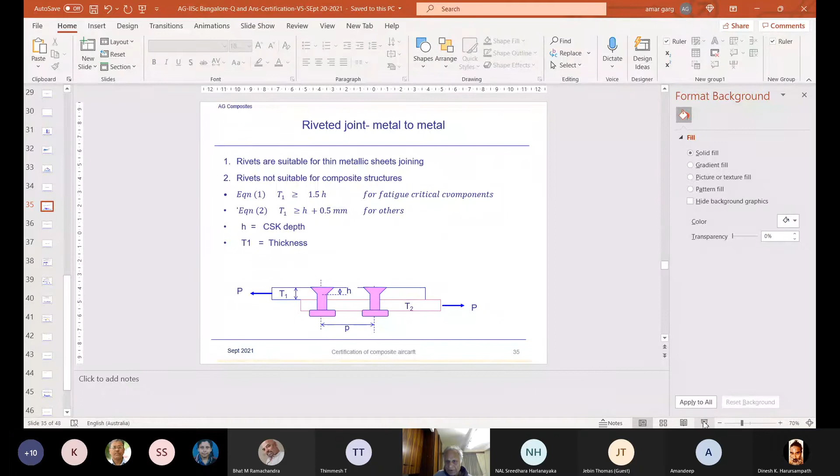Good afternoon everybody, it's the third lecture of the series of lectures. Before I start my certification lecture, I think I would just try and show some of the answers to the questions raised during the last lecture. Can you see my presentation now? Yes, we can. Please go ahead.

Okay, now some of the answers. One question was raised: we showed WFD's MED, MSD for metallic structure, how it is applicable to composites. I said damage propagation due to fatigue. Also, we know composites are not sensitive to fatigue damage propagation under cyclic loading as metals are, and the composite philosophy generally shows no growth of damage.

Some of the issues with this, I could discuss for a long time, but I don't have time currently. We could recognize that WFD for such a structure could be delaminations or bond line failures at a couple of places, and then during fatigue, these delaminations or bonds could grow and try to merge together to form a large disbond. So this could be considered another widespread fatigue damage.

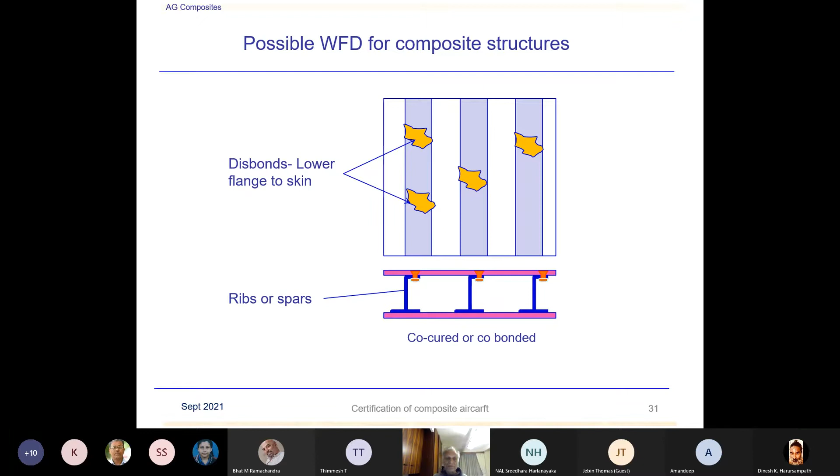In composites, another scenario could be similar to the previous slide. You have the stiffeners which are bonded, generally co-cured, or could be co-infused, and they could have some disbonds at localized positions. During fatigue, they could grow at various elements like stiffeners and join together, and they can disbond and fail these stiffeners, so structural integrity will be an issue.

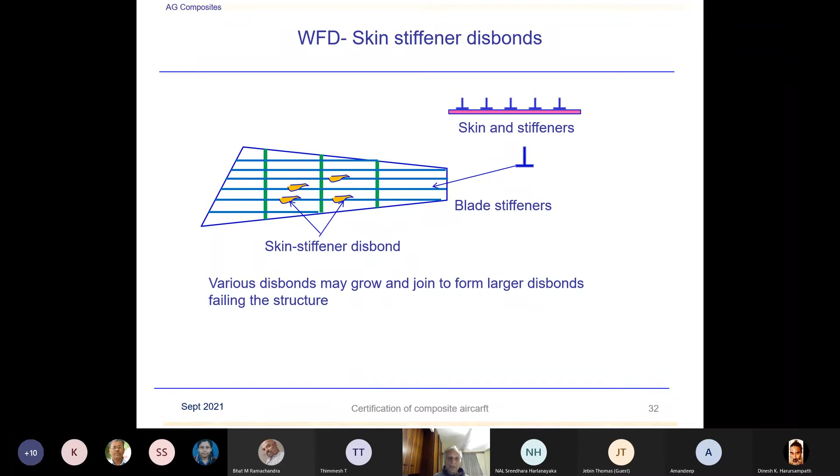Same thing could happen. You see a typical structure where we have the skins joined together. At the trailing edge, I've shown it has to be a double countersink fastener, because you need an aerodynamic surface on both sides. And generally what happens is these double countersink fasteners are always a problem in the trailing edge joints.

There's a possibility under cyclic loading these fastener rivets—we don't call them rivets, we call them fasteners, double countersink fasteners—could fail under cyclic loading in an emergency situation, high cycle fatigue, like the flap being in an engine environment with very high cyclic fatigue loads. It's possible some fasteners might fail if not properly designed, and once they fail, they can start unzipping the trailing edge. So this is another widespread fatigue damage in composite structures.

I could list many other scenarios for such damages. However, these are just examples I've tried to show to justify that WFD is not only defined for metallic structures, but is equally valid for composite structures in various scenarios.

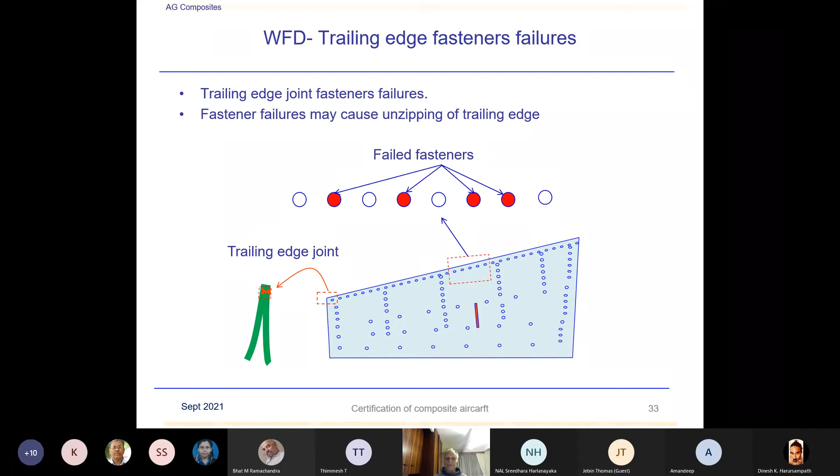All right, I won't go into the details of this one. Next, another question was asked about some guidance on riveted joints. Normally in composites, we never use rivets. Suppose using thin sheet metallic structures where rivets are used for fastening—I won't go into the details of this. Again, rivets are suitable for joining thin metallic sheets, and rivets are not suitable for composite structures. As I said, we don't use rivets in composite structures.

So the requirement for a countersink, so the knife edging is avoided, is T1 must be greater than 1.5H, or H by T less than 67%. Normally we design bolted or riveted joints so the countersink does not cause knife edging. Another requirement has been put by Michael Niu—normally we don't use this requirement, but I've quoted it. Michael Niu mentioned this in his book, and normally we design all our structures with this requirement.

Now I won't go into the details of this because, as shown in the next slide, there will be a separate lecture delivered on bolted joints. I've got about 150 slides for the bolted joint, and although I had committed to Professor Dinesh on the bolted joint, depending on the time permitted I will consider it—it's a very interesting aspect because joints are very important in the structure, and one has to be very careful designing the joints.

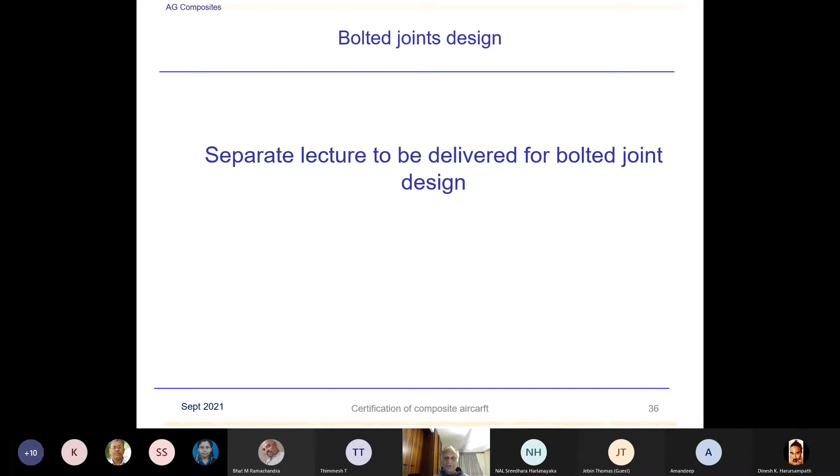So I would take up all the issues about the bolted joints for the composite structures later on.

A bond test - somebody asked for guidelines on bonded joints. I've just put this up very shortly, because bonded joints itself is a big subject and I could have a whole lecture on that. This is just for qualitative tests, because normally if you want to quantify the strength of an adhesive, it's very difficult to find a coupon which gives you a good adhesive strength representative for the structure. There are a lot of issues with these coupons. They are just used as a qualitative test to compare one adhesive to another, and even then it might be difficult to compare using these specimens.

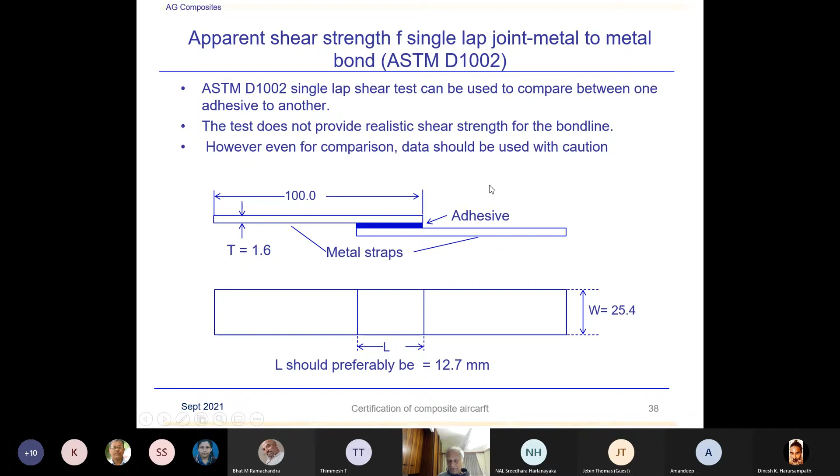When you load this specimen, if you can imagine, because of load eccentricity it will bend over here and create a lot of peeling failure. So ASTM D1002 single lap shear test can be used to compare one adhesive to another. This test does not provide realistic shear strength for the bond line. However, even for comparison, data should be used with caution. You can look into the ASTM D standard - I can send you a copy later, or you can find it in your library. I've never used these coupons, by the way.

Another test - I have not drawn the whole picture - is the thick adherend test. This is quite commonly used to assess the stress-strain behavior for the adhesives, shear strength to strain, shear stress to strain behavior, to determine the shear modulus, and usually then determine a bilinear curve for the adhesive. The test is expensive. You can read about this in ASTM 5655, and I cannot go into the details of this test because of time limitations.

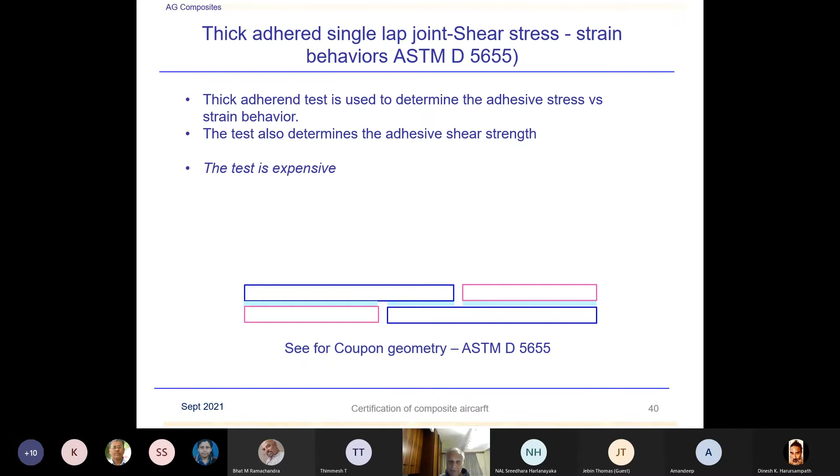Then our preferred approach normally is this one. Rather than the strength approach, as I mentioned last week, in today's time we would use the fracture mechanics approach for bonded joints, not the classical strength approach. So current practice to analyze adhesive bonded joints is based on fracture mechanics. An initial flaw of length A is assumed to exist at the bond line.

Normally it would be like 6.4 millimeters long and full width. So fracture analysis is performed for mode 1, mode 2, mode 3 to determine bond line integrity. At present I may not be able to go into the details of mode 1, mode 2, mode 3 failures - this could be another lecture.

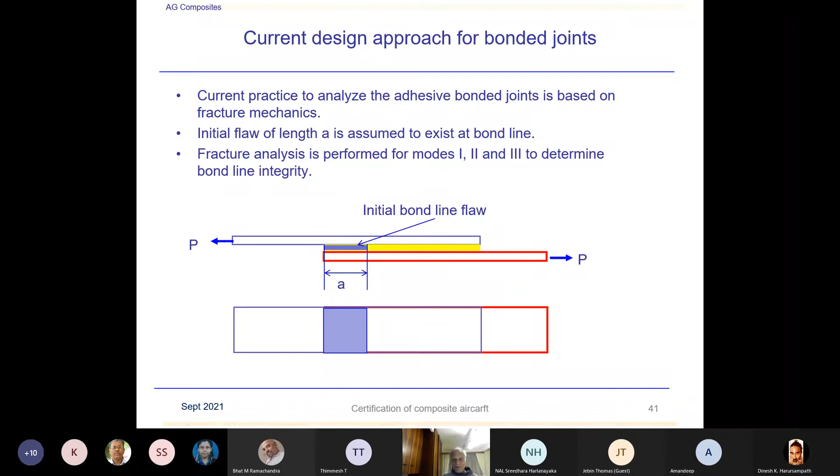In order to generate the fracture toughness, since these are really reliable, you use the fracture mechanics approach. Using a double cantilever beam specimen, you determine G1C, mode 1 fracture toughness, and edge notched flexure gives G2C. Usually the mode 3 value we would normally consider equal to mode 2, because mode 3 testing is difficult to perform in order to determine G3C, and since it's also a shear mode, it is usual practice to assume G3C equals G2C.

I've shown roughly the schematic coupon over here. Normally this coupon is 12 inches long, and the thickness could be about 2.5 to 3 millimeters for DCB. The same coupon could be used for ENF, which is called edge notched flexure, and this is a 3-point bend test. Equations are provided in any of these methods documents - you could look into NASA or ASTM.

These are very tricky tests. Let me tell you, what you will find using these ASTM standard tests is that you might still have to manipulate or juggle around to really find the initiation, and it's not easy. It looks simple, but when you are trying to determine the right value of G1C, you find lots of scatter when you have analyzed the data for G1C and G2C. Then you have to fix up your criteria - what is my criteria in order to define G1C? Initiation, or 2% growth, or 5% growth - those criteria, I tell you, you will find a lot of variation in that.

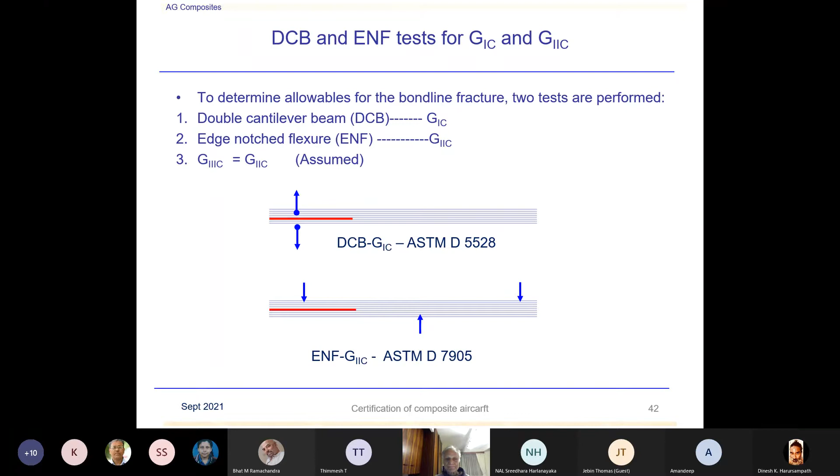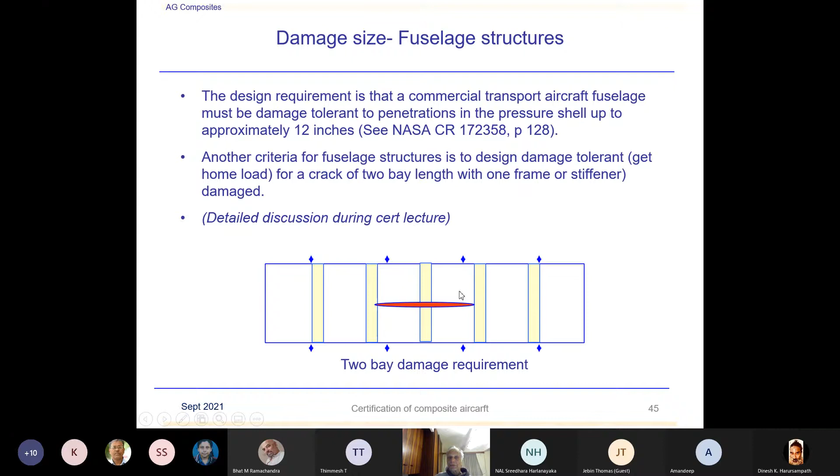Okay, next one, what did I have? Cabin noise. I'm not very familiar about this subject, and I did not really understand the question properly, whether it was about cabin noise source reduction. If the person who asked the question could elaborate. Sir, what I meant was the sound attenuation offered by composite structures is less compared to metallic structures—I read that in an article. So if that's the case, for the same external noise which occurs due to aerodynamic noise, whether the cabin noise, meaning interior of the airplane, will be higher, and if so, it will affect human comfort. That was the point I was asking.

Okay, now if you look into current transports, the 787 is fairly quiet, and this noise consideration has been there because sources of noise are many—due to engines, the turbulent boundary layer, interior air conditioning systems, pressurization—all that has been considered, and there are noise absorptions. But I'm not very familiar about this; I could look into it now. You've elaborated the question a bit more, and next lecture I might try to look into it more carefully and answer your question. That's okay sir, thank you.

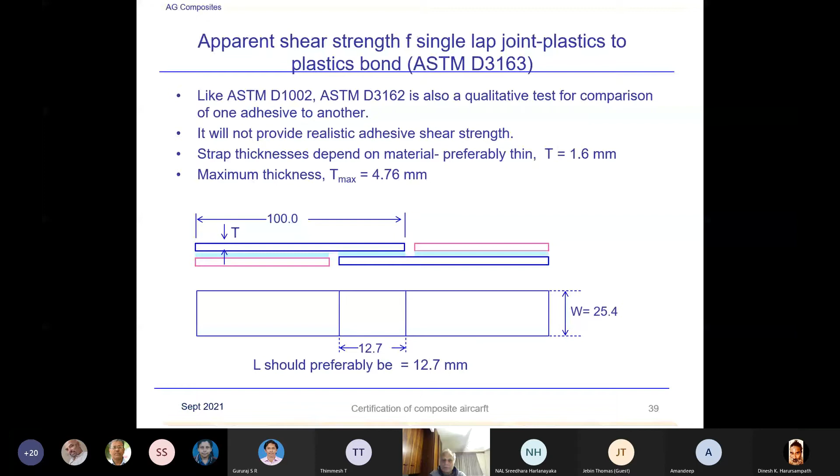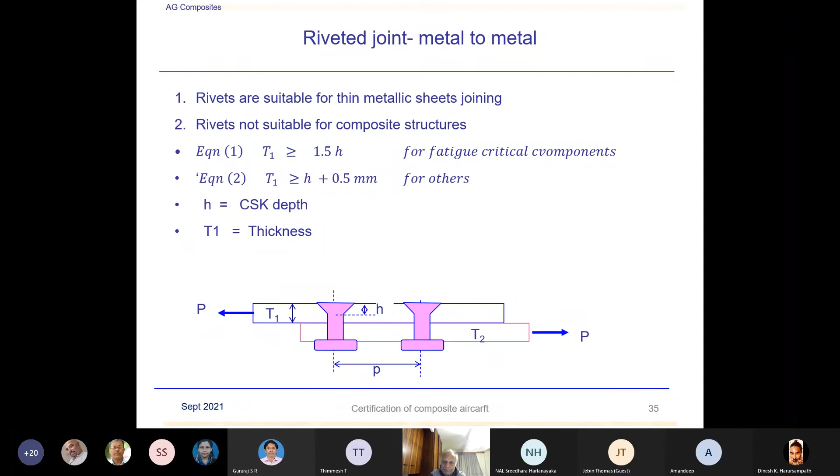So was there any other question from the previous one which I missed out? Anyone? Are the persons who asked the question satisfied with these answers? Okay, if there's no concern, then I could stop this presentation and share the next one.

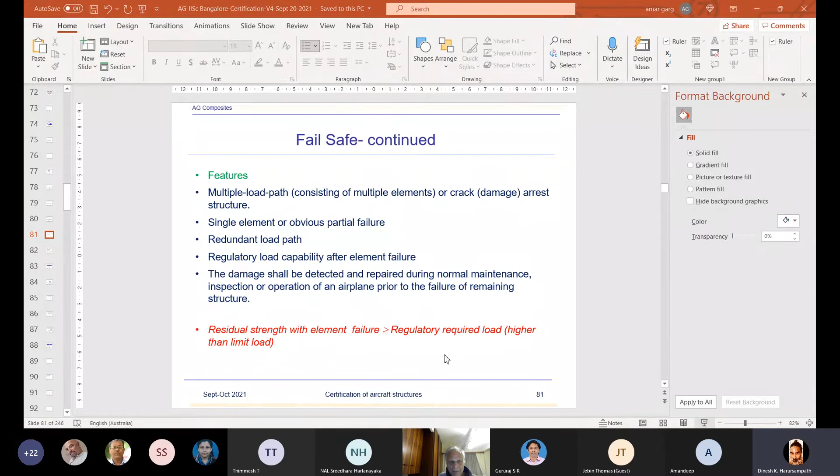Can you see this presentation now, the certification one? Not yet, Dr. Garg. That means let me go to the tray again. Share. Stop sharing, share, open tray. Okay, we can see a slide titled 'fail safe.' So this is the one which—I've forgotten where I stopped last time. I think I stopped at this slide, and then we said we'd restart fatigue and damage tolerance. Did I show this slide last time or not? I'm confused because I was delivering a lecture to IIT Kharagpur people also last week, so I've forgotten which slide I stopped at. No, this slide was not discussed, Dr. Garg. Okay, I think we can start from here. Yeah, I'll start from there.

So, structure fatigue and damage tolerance. Now, fatigue life philosophy—this is important to consider the various philosophies: safe life, fail safe, damage tolerance. What is the difference between these three? If you remember last week when I was talking about historical failures and how the certification approach changed—initially, when the Comet failed, the desired approach was safe life.

After that, in 1978, damage tolerance came up—sorry, after the Comet failure, the amendment was in the mid-50s when fail-safe was introduced, and later on, when another aircraft failure occurred, even fail-safe was not adequate, so damage tolerance requirement came in. So after '78, it's a damage tolerance requirement.

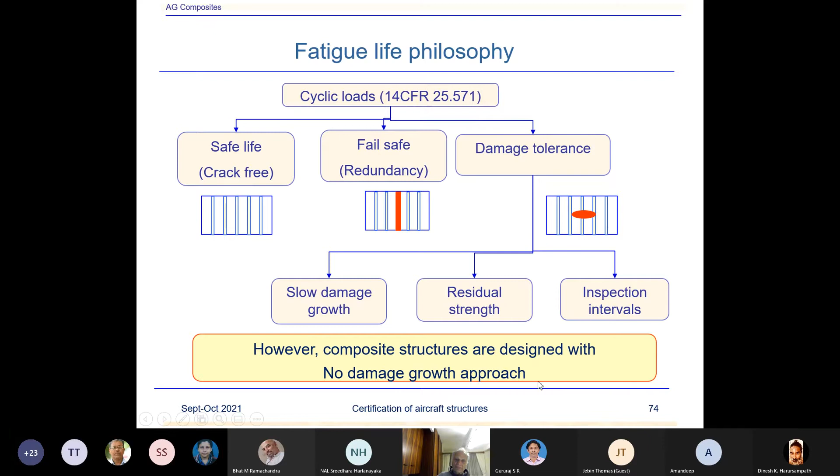The issue with slow damage growth prediction is in metals. That's fine because you can predict the life or number of cycles within which the initial crack will grow to a particular length. However, that damage growth prediction is not possible for composites. There are hundreds of publications where people have tried to predict damage growth in composites using several different methods, and still it's not a reliable or easy solution. That's why the current approach for composite structures is the no damage growth approach. We'll talk about this in more detail.

I just quoted a few paragraphs from the 571 requirement, the safe life requirement. Fatigue safe life evaluation: compliance with the damage tolerance requirements of paragraph B, which is damage tolerance, is not required if the applicant establishes that its application for a particular structure is impractical. What this says is, if for a particular structure damage tolerance is not possible, then safe life could be used - that is, inspection is not possible, as I showed last week in the failures diagram. The structure must be shown by analysis, supported by test evidence, to withstand the repeated loads of variable magnitude expected during its service life without detectable cracks. And an appropriate safe life scatter factor must be applied, of course.

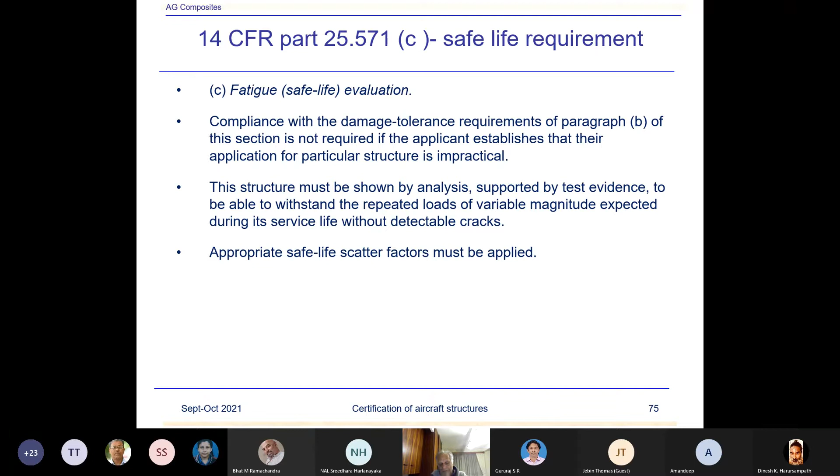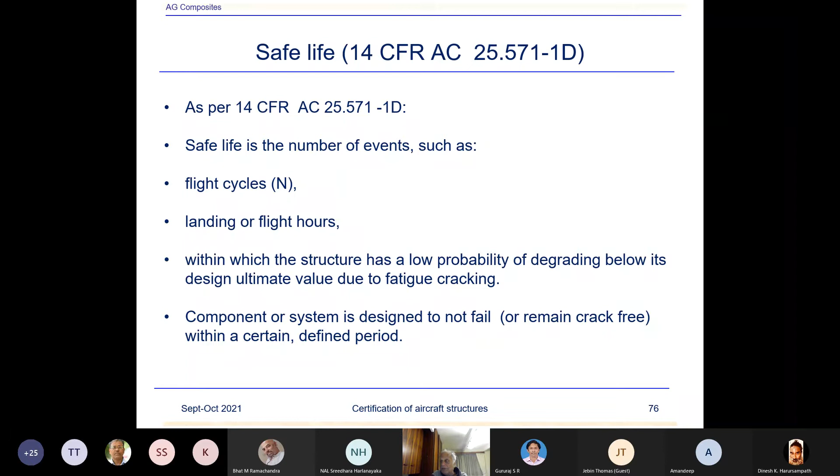So, safe life - how does 14 CFR AC 25.571-1D define it? Safe life is a number of events, such as flight cycles, landings, or flight hours, within which the structure has a low probability of degrading below its design ultimate value due to fatigue cracking. So a component or system is designed to not fail or remain crack-free within a certain defined period. It should not develop any crack for the defined period for which you have designed the part.

This is what I have diagrammatically shown when you try to justify a structure based on safe life. Here you see the residual strength capability plotted against cyclic loads. Suppose you have tested the component for N-test cycles - the residual strength after the end of this N-test should be above DUL, the design ultimate load carrying capability of the structure. Then you define safe life as equal to N-test divided by SF, the scatter factor, which for metallic structures is generally around 3 to 4. So basically, if you want to design a structure for 20,000 flights, you'll have to test it for 80,000 flights in order to justify that 20,000 flight life.

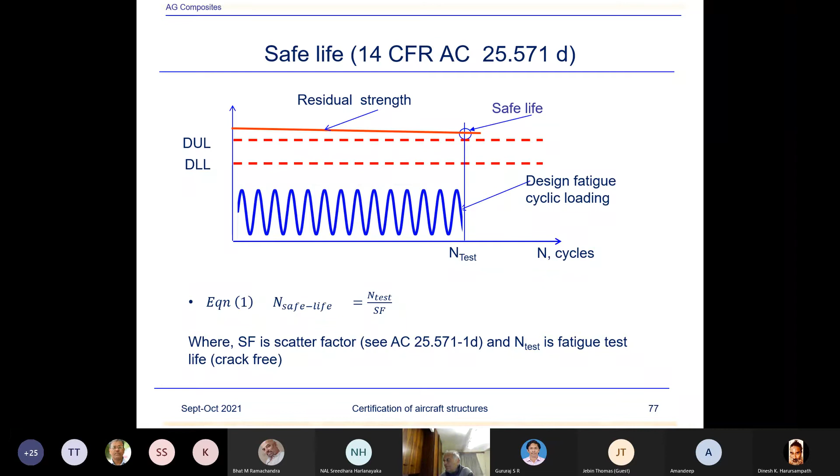Now, in spite of that 4 or 5 times safety factor, structures have failed earlier than expected, and this table is evidence of that. I've taken examples - these are all fighter aircraft. The KC-135 had a design safe life of 13,000 hours, wait - actually 13,000 safe life hours, however there were 14 cases of unstable cracking in the lower wing skins between 1,800 to 5,000 hours, and the lower wing surfaces were reskinned at 8,500 hours.

Next, the F5 had a 4,000 hour design life, but fatigue failure of the lower wing skin root region occurred at 1,900 hours, causing loss of the aircraft. Serious. The F111 had a 4,000 hour design life, but fatigue failure of the center box occurred at just 105 hours, causing loss of the aircraft. This fatigue failure was caused by a defect in D6AC steel center wing - this is brittle steel, and this is nasty. What happens is there could be a minor defect which you can't inspect internally, and that defect could be fatigue critical, causing a significant reduction in life.

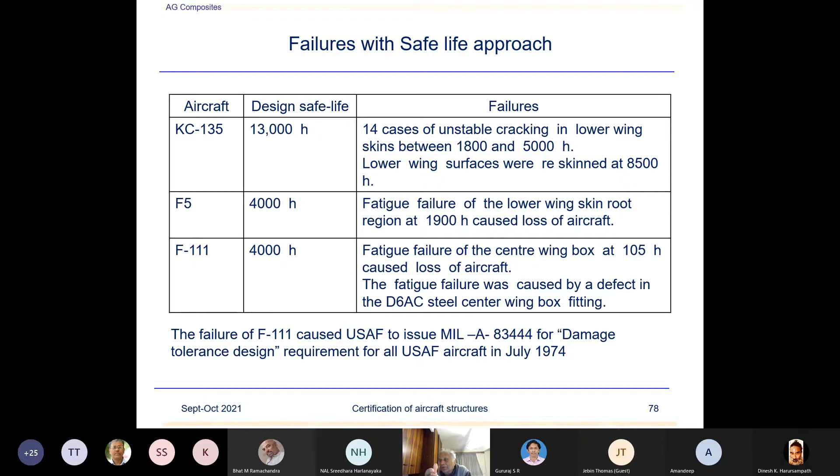This MIL 83444 document is obsolete. It has been replaced by JSSG 2006, which you'll find in my references. You can download it from the internet for free. It's interesting, especially if you want to understand a military airplane like Tejas. It may help you understand the certification philosophy. Most of the criteria is similar to FAR transport aircraft, but there could be some differences.

Issues with safe life, I've already talked about. I won't go into the details of this.

Now, fail-safe requirement. The definition per 14 CFR AC 25-571-1D: fail-safe is the attribute of the structure that permits it to retain its required residual strength for a period of unrepaired use after the failure or partial failure of a principal structural element. When one element fails or partial damage occurs, the remaining structure will not fail within a specified period of time, and residual strength with element failure must be greater than the regulatory required load.

As I said earlier, with fail-safe, one of the members fails and it could be detectable damage. However, you don't repair immediately. This damage should be able to be sustained for two inspection intervals without reducing the residual strength below limit load. So the regulatory required load is normally the limit load carrying capability. Residual strength with element failure must be greater than the limit load requirement. That's the requirement.

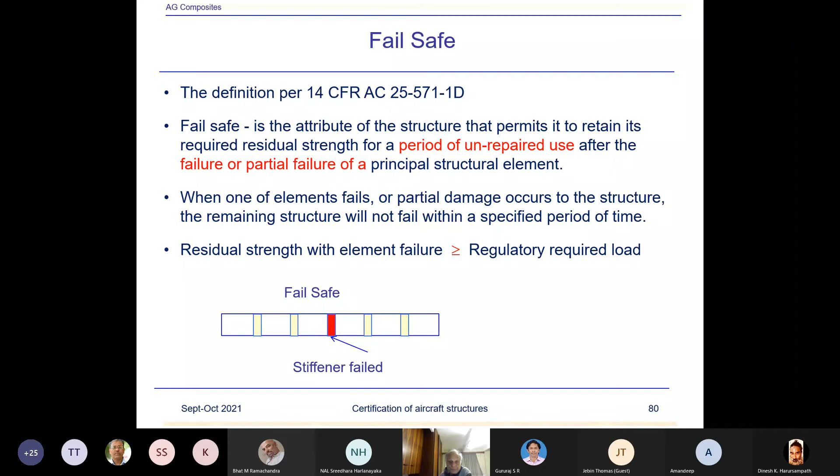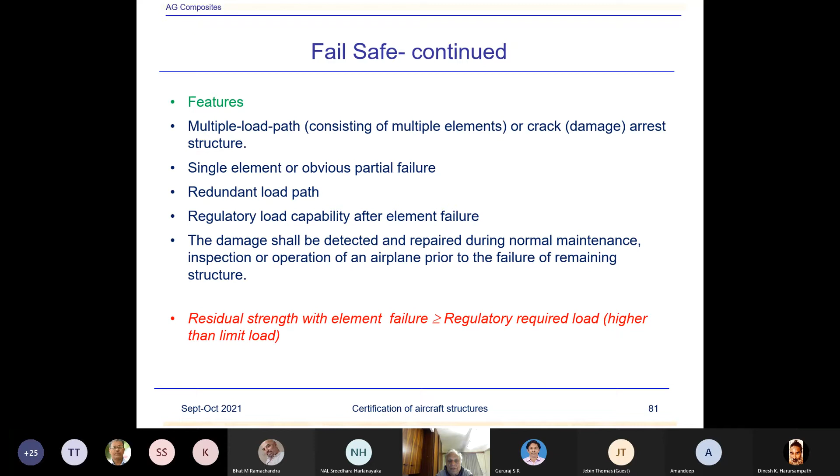The fail-safe feature includes multiple load paths consisting of multiple elements, crack damage arrest structure, single element or obvious partial failure, and redundant load path with regulatory load capability after element failure, normally the limit load carrying capability. The damage shall be detected and repaired during normal maintenance inspection or operation of the airplane prior to the failure of the remaining structure.

Now, what is damage tolerance? This is what the main focus of our investigations would be. As I said, for current structures, in the majority of cases it's mandatory to design the structure with damage tolerance capability, unless we can't meet the requirement of damage tolerance, in which case we go back to safe life.

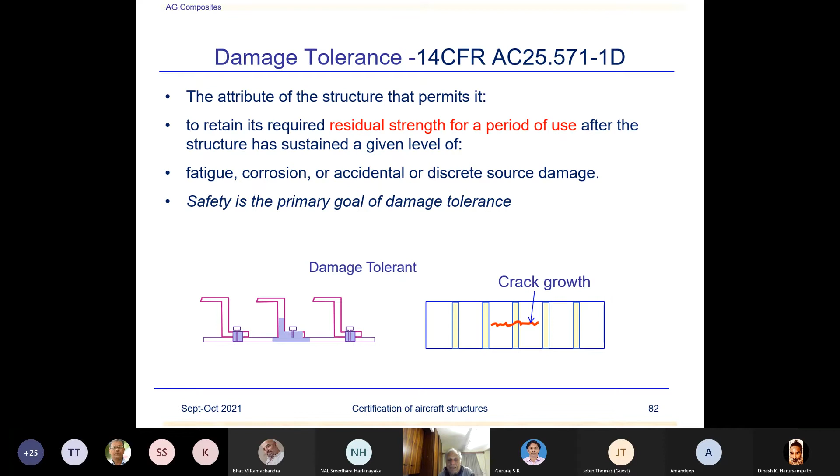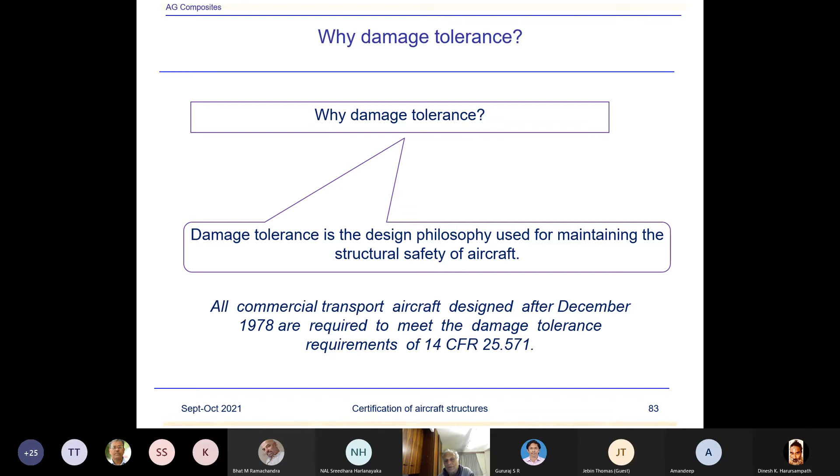Why damage tolerance? Damage tolerance is the design philosophy used for maintaining the structural safety of the aircraft. That is the major reason for designing the structure for damage tolerance. Safety is the primary goal. All commercial transport aircraft designed after December '78 are required to meet the damage tolerance requirement per 14 CFR 25.571.

Category 1 damage is undetectable damage. There are lots of damages like barely visible damage or manufacturing flaws like delaminations. Your inspection capability can't detect delaminations or disbonds in the structure below a quarter inch, or 6.4 to 7 millimeters, depending upon the probe. So those damages could always remain because they're beyond your inspection capability.

In the factory, there could be some damages like BVIDs. Fortunately, in metal, if there's a tool drop, hailstone impact, or some impact damage, the damage will be visible on the surface. Unfortunately, in composite, the damage caused by impact may not be visible on the surface—that's typical of composite structure. However, that impact would have done enough damage to the internal plies in terms of disbond, delamination, fracture of fibers, and cracks. So the requirement addresses BVIDs.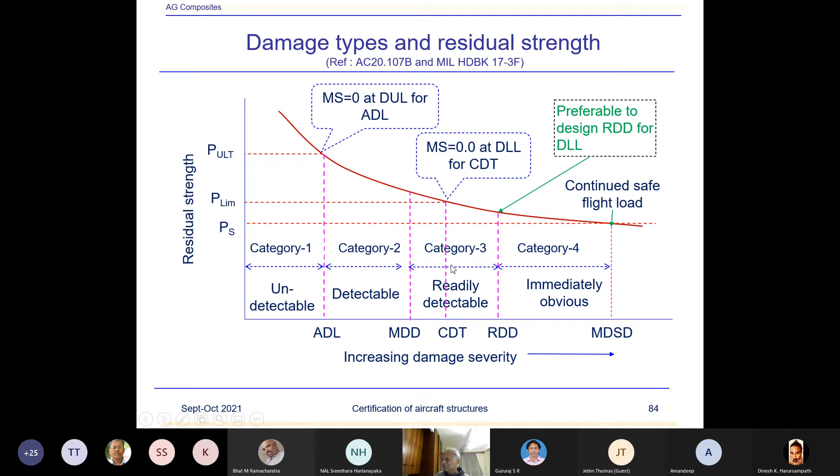Right, okay. Now category 1 damage, non-detectable or barely visible impact damage. This is designed to design ultimate load. Category 2, detectable damage, damage is detectable with high probability during walk-around.

Requires repair per inspection process when detected, that is after 2 inspection intervals, because you don't repair every time damage is found, you just ignore it if the residual strength capability is higher than limit. Design limit load until defined inspection interval, that is 2 inspection intervals normally we define.

Category 3, obvious, readily detectable within a few flights. When such large damage is there, like 6 inches, depending upon the criteria, I'm just quoting 6 inches, it could be 4 inches or more, readily detectable within a few flights of occurrence. So what happens in this one is this damage doesn't have to wait for inspection intervals. When during walk-around inspection such large damage is seen, the aircraft will not be allowed to fly until repair is done. So that's the difference between category 2 and category 3 damages, the repairability.

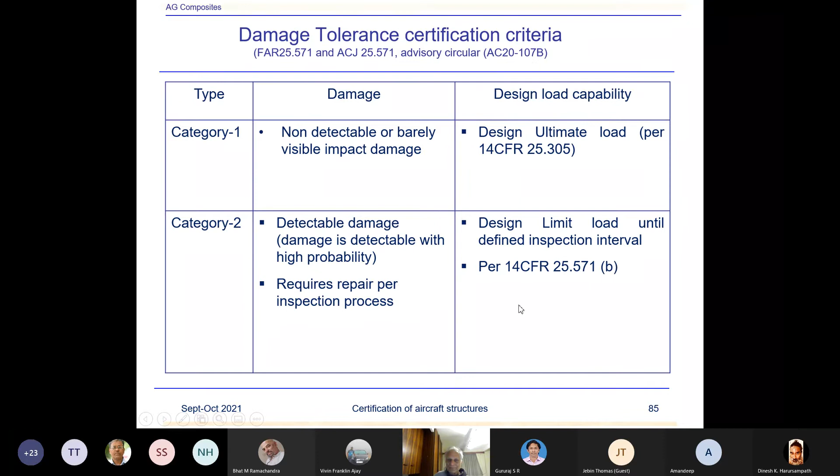So this is obviously detectable damage within a few flights of occurrence, requiring immediate repair, because that's a requirement. Once detected, the aircraft is not allowed to fly until the damage is repaired and returned to the ultimate load carrying capability. When you repair the damage, the strength after the repair must be ultimate load carrying capability, there is no reduction in that load carrying capability definition. Repair must be as per the new structure capability.

Excuse me sir, I have a question. Sure. Actually sir, when you're saying requires immediate repair, how exactly is the repair done? Because in case of composite structures, the parts are fewer, right? So do you just fill in the cracks, or I'm not understanding how the immediate repair is done?

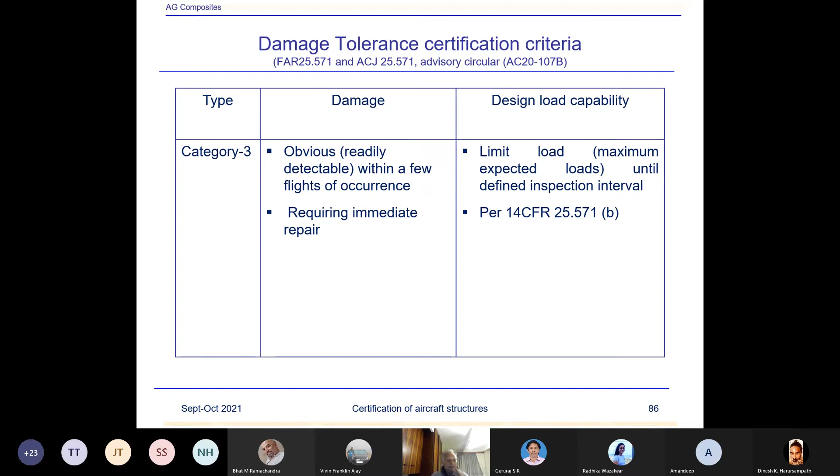You're asking me to define, okay. That depends, suppose there is a damage, suppose you have a skin, your skin gets damaged, then you have to repair like a scarf repair. Let me just try to find a slide if I can, to show you. In fact, I've done a lot of work on repairs. I'm not sure, let me see if I had put it in the ADA lecture. Sure sir. Question answers.

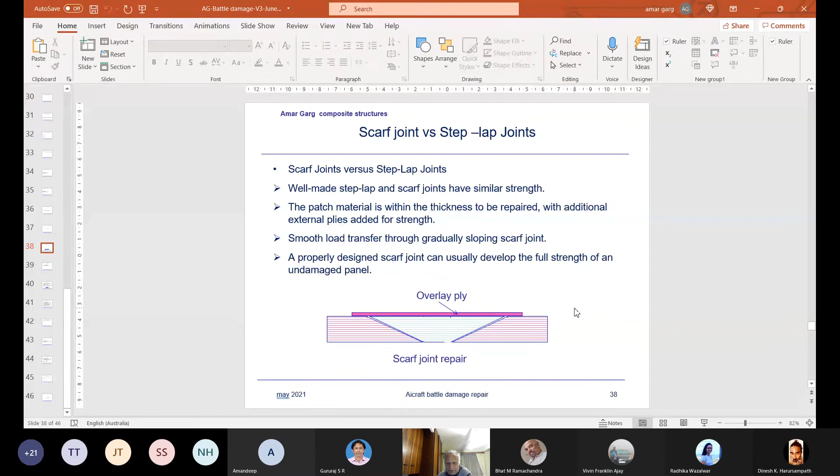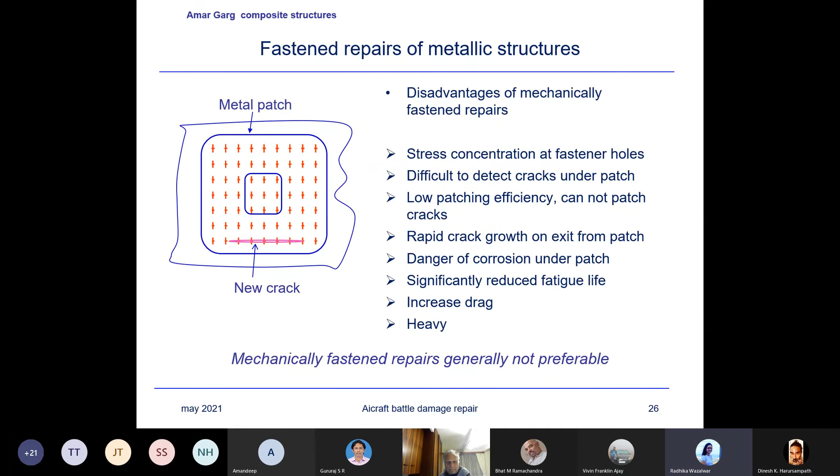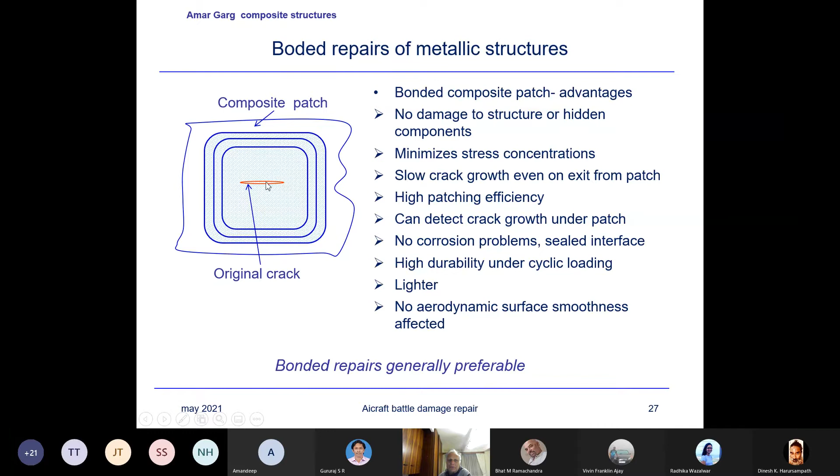Bonded structures. Suppose you have a skin, and there's damage. Normally you won't have such a sharp damage. In metals it's okay, but in composites the damage could be like a hole. So what you do is remove that damage, smoothen it out, scarf it. Normally we do the scarf repair, shown here in a section like this one.

So you have a damage, this was the amount of damage. But when laying up the plies, you can't just make a straight repair, so you scarf it. Normally the scarf angle is 1:30. For thinner structure, it could be as much as 1:50, otherwise around 1:30 scarf repair. I could talk more about that, but it's a detailed subject for repairs.

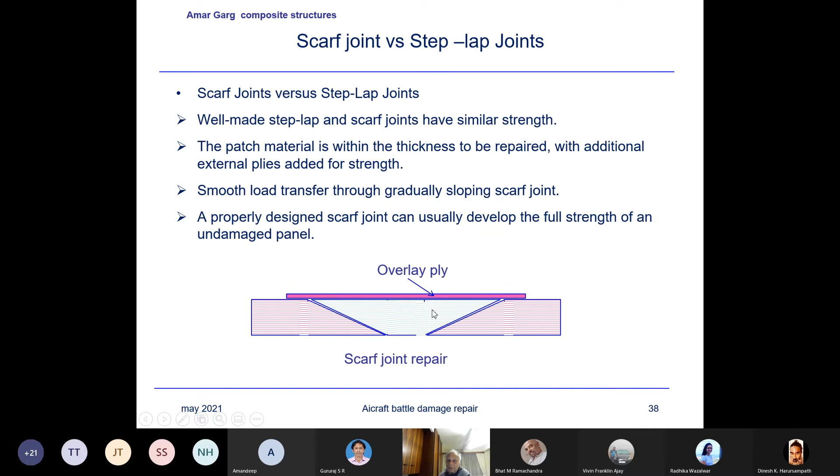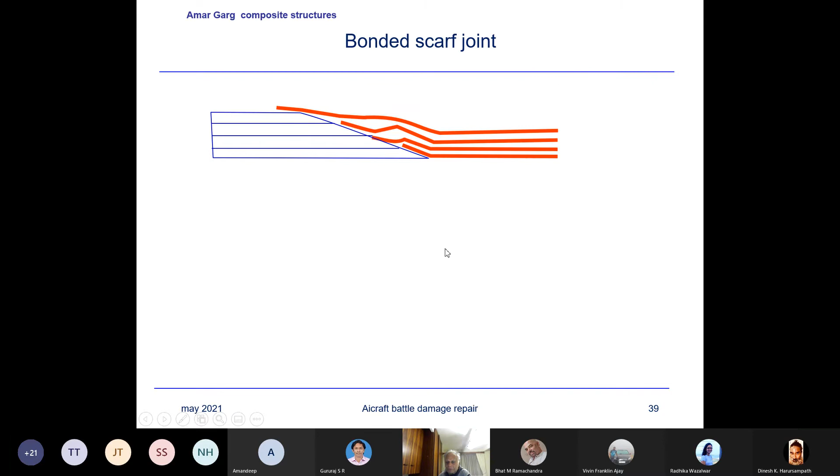And we lay up the plies. So this is our pristine structure, these are the repaired plies, and we put an overlay ply. This is a normal scarf repair, shown like this. This is every ply, and you are putting the repair plies with the adhesive. So normally this is the scheme. Another step-lap - rather than the step, we normally use the scarf I've shown you.

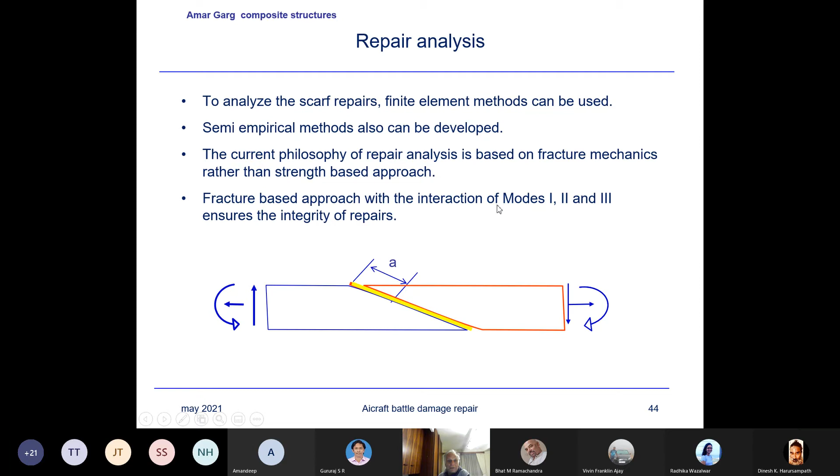This is just showing a coupon, which we normally consider in order to justify the repair. I've done a lot of work on repair justification. We would consider a fracture mechanics approach rather than the conventional strength approach - like the bond line fracture mechanics approach I talked about, which I'm very conversant with. I developed this methodology for the fracture mechanics analysis some time back. I can't go into the details because it's again a big subject for repairs of these structures.

Yes, I got it. Thank you. Okay, that's interesting.

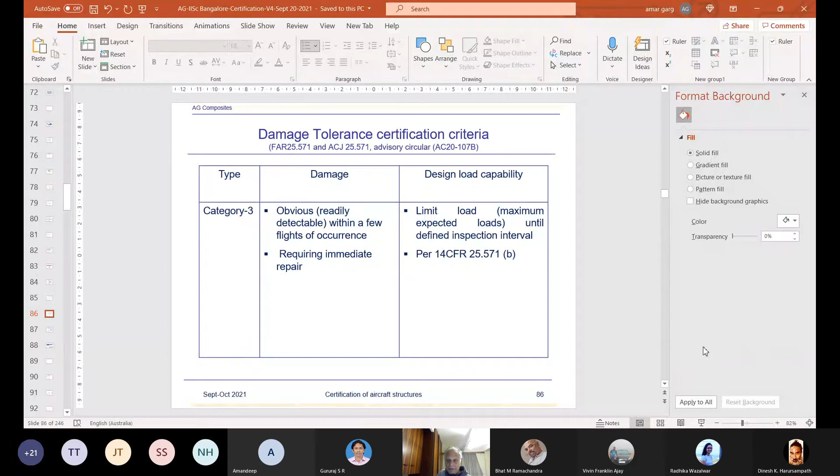So now let me just consider... okay, now this one. Category 3, category 4. Okay, you can see this presentation now? Hello? Yes, sir. Okay, so category 4.

In that diagram, category 4 damage is discrete source damage, which occurs during the flight, and the pilot or flight crew knows when it occurs. The causes of the damage could be bird impact, uncontained failure of engine, fan blades, high energy rotating machine, sudden decompression of compartment - requires repair before next flight.

Design load carry capability, according to the requirement, is the maximum loads expected during completion of the flight and 70% of limit maneuver loads and 40% of limit gust load, combined with maximum appropriate cabin differential pressure. Part 25.571E.

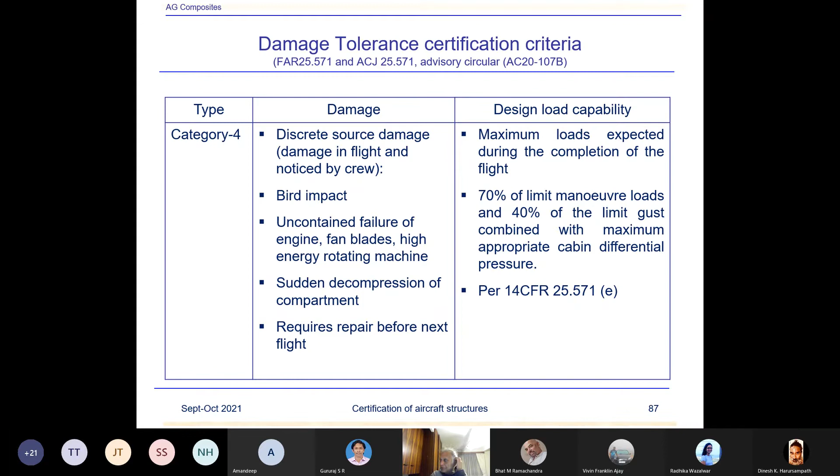Okay, so these cover the definition of various categories of damages, and I would recommend those of you interested in reading a few more details to look into AC 20-107B, which defines these damages in detail, or MIL Handbook 17, Volume 3.

Okay, now structure damage tolerance requirements from the compliance point of view. If you remember, previously I defined two types of structure: one is principal structural elements, another is non-principal structure. You can consider principal structural element to be a primary structure and non-PSE like a secondary structure. Normally we don't call them primary/secondary - according to 571.1D definitions, usually you call them PSEs and non-PSE structures.

That's the usual definition these days. So for damage tolerance, when trying to satisfy requirements for PSE, which is critical structure, you consider damage tolerance per 14 CFR 571 - that's what we've been talking about, damage tolerance in categories 1, 2, 3, 4. All of categories 1, 2, 3, 4 have to be considered for primary structures. Whereas when justifying non-PSEs, this criteria is not applicable - 571 not required, only category 1 damage tolerance diagram required. That is only BVIDs, very small undetectable damages, but not the detectable damage, for non-primary structures, non-PSEs.

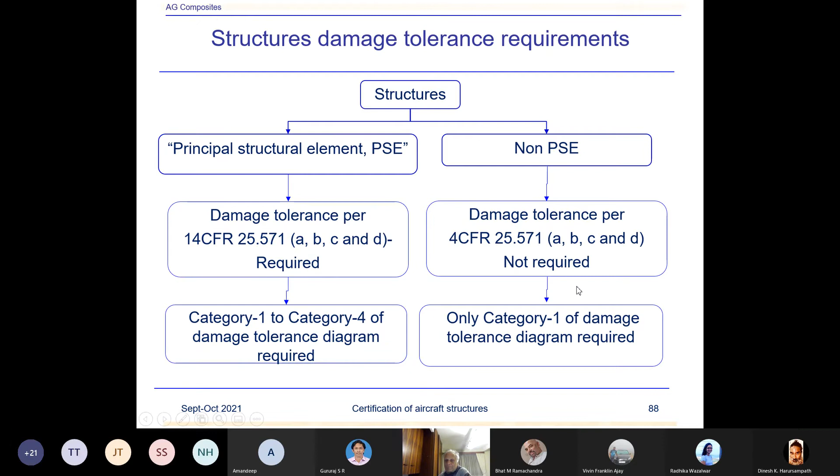So, okay, now what is durability? The durability is the ability of the structure to resist cracking, damage growth due to corrosion, hygrothermal degradation, delamination, wear, and the effect of foreign object damage for a specified period of time. Normally in durability we consider that damage doesn't initiate.

So durability addresses largely the economic issues. Damage tolerance addresses the safety issue, and durability addresses the economic issues.

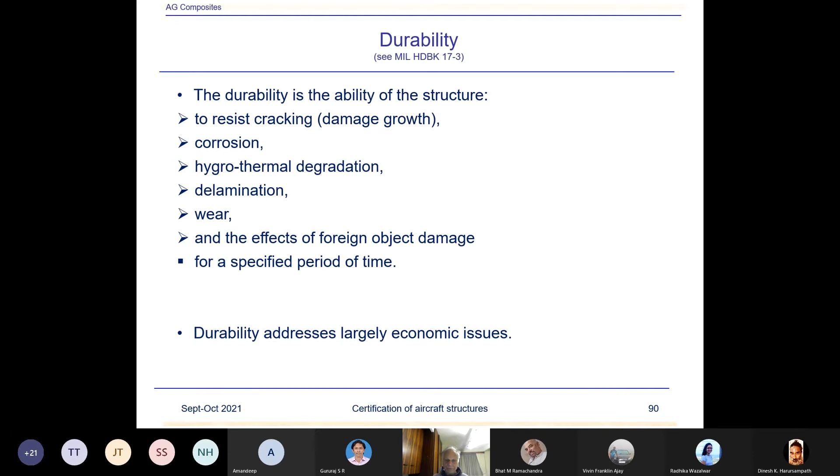The difference between damage tolerance and durability, I have tried to show in this slide schematically in a simplistic way. So durability often addresses the onset of damage from the operational environment. Okay, so what you see is damage size versus damage propagation.

Now, it looks like both are the same. The difference which I am trying to highlight here is that in this case, the damage size is not growing at all. It's a damage initiation phase, we call it. In this, the initial damage, if you have defined it like a hole, say, then it starts growing, and that's a damage tolerance design approach in this case.

You are trying to consider how much the damage is allowed to grow before it becomes critical from the residual strength standpoint. In this case, you are considering damage does not initiate. So basically, this is like a safe life approach here. In safe life also, we say damage is not initiating. So this is like a safe life here. This is damage tolerance.

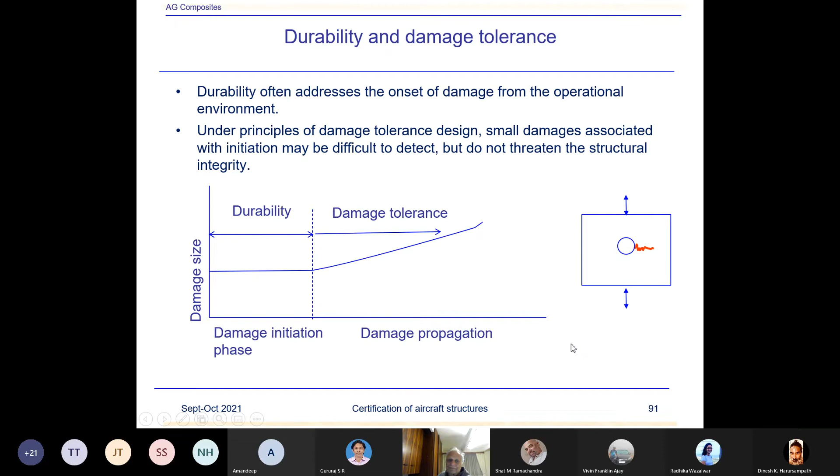Okay, damage definitions and sizes. Let me give you the idea about what damages I've been talking about and what is the BVID, VID, and all that we talk about. Now, BVID is damage visible from a distance of 1.5 meters in a hazy light with unaided eyes. You don't use any magnification. Just when a person is walking, the damage should be visible from a distance of about 5 feet or 1.5 meters, and not in bright daylight, but even in a hazy light.

Then depth. Now, depending upon the organization, depth could be 0.25 millimeter to 1.0 millimeter for commercial aircraft. This is after the damage relaxation. You try to impact it. Suppose at the time of impact, the damage is 0.3 millimeter, 0.4 millimeter. After 24 hours, that 0.4 millimeter may drop to 0.25 millimeter because it relaxes.

Composites are viscoelastic materials, and with time they relax. So what happens? The initial damage, the dent depth would reduce after 24 hours or after 2 days. So when we are specifying the size, these sizes are after the damage relaxation.

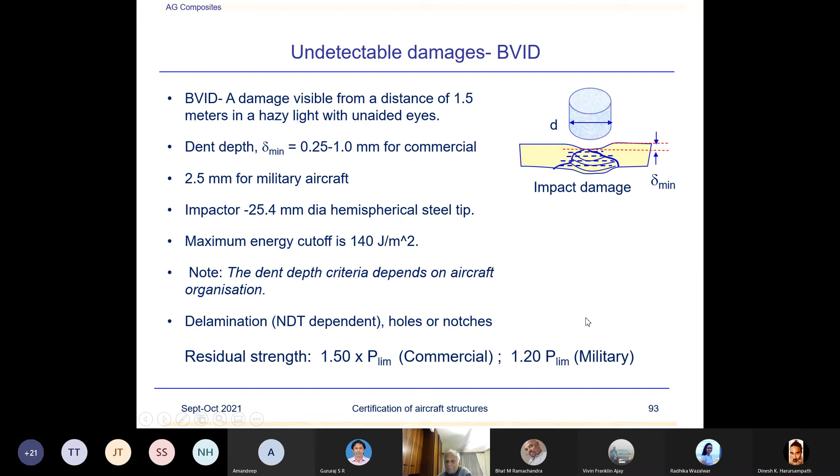Next, undetectable damages, we consider like holes, notches, delaminations. Holes or notches, normally we consider up to the 6.4 millimeter or 1/4 inch hole. That's a standard for justification, considered as undetectable damage.

Delaminations, half inch by half inch, that's the usual consideration, even though when doing NDT analysis using some probes you might be able to detect around 6 to 7 millimeter. However, to be conservative, the industry practice is to consider half inch by half inch delamination for civilian aircraft.

For military aircraft, delamination requirement is 2 inches, which is a fairly severe requirement. So residual strength degrades quite rapidly when you have a 50 millimeter circle compared to half inch by half inch damage.

However, the residual strength requirements are similar to the previous one: the limit, 1.5 times limit, that's the ultimate load for commercial, while 1.2 times the limit for military aircraft. I've just shown schematically the delamination and NDT limitation, holes and notches.

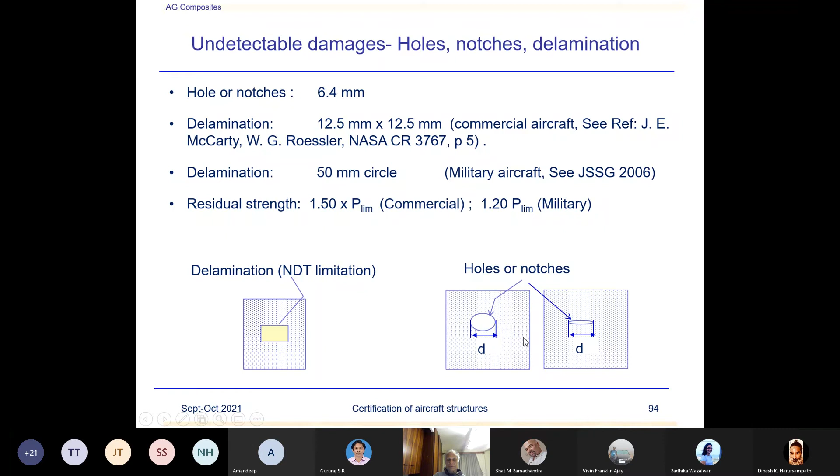Undetectable damages, continuous surface scratches. Military aircraft requirement, JSSG 2006, specifies the minimum scratch to be considered as BVID, as the undetectable damage: 100 millimeter long and 0.5 millimeter deep.

Why I'm describing it, it might be interesting for you, because suppose you are looking into aircraft like Tejas or ADA, HAL, they would have used these requirements from JSSG 2006, possibly. So it might be useful for you.

For civilian aircraft, of course, there's no requirement prescribed by the FAR regulations. However, industry will definitely specify some requirement for the surface scratches. It could be 2 inches, it could be 3 inches, it could be 1 ply deep or 2 ply deep. I can't give the exact figures, because unless it's published, I won't be able to specify what the industry prescribes.

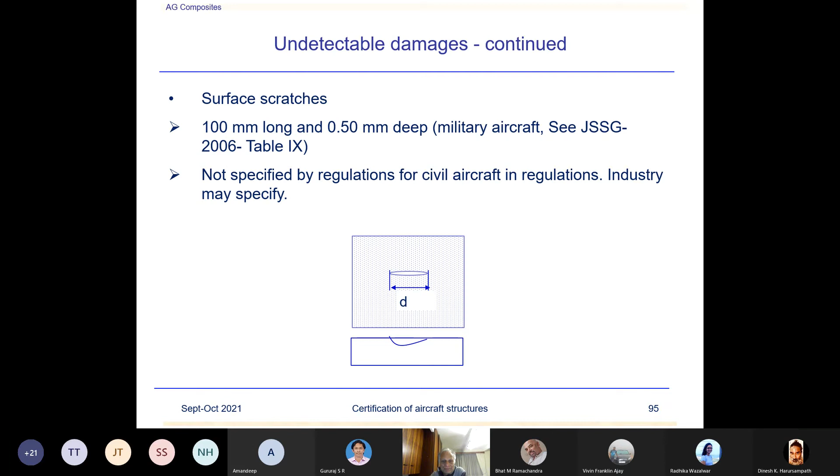Okay, detectable, readily detectable damages. So I did talk about detectable damages and RDDs, readily detectable damages. So visible impact damage normally has a dent depth greater than 1 millimeter. Impactors could be larger here, 100 millimeter tip and 25 millimeter tips. Energy levels, for BVID or undetectable damage the energy limit was 140 joules, whereas for this one there is no energy cutoff.

That means, suppose you have a half-inch skin, and you want to create a dent depth of 1 millimeter, you might have to apply like 300 or 400 joules of energy. But the requirement is you would have to create that much dent depth independent of the energy cutoff, to satisfy the damage tolerance requirement and show the residual strength for that thickness. Residual strength, of course, is the limit load carrying capability.

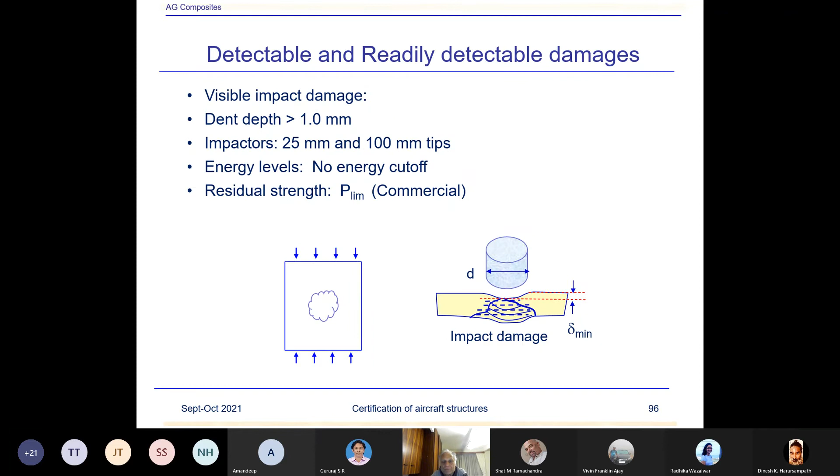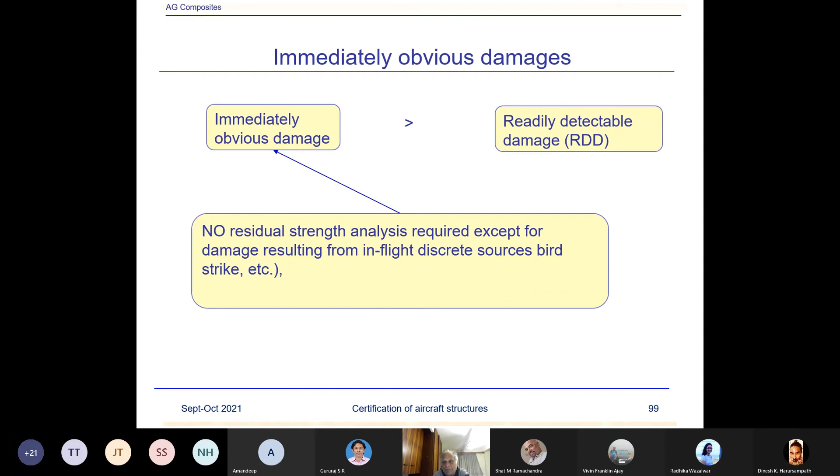Immediately obvious damage, which is known to the pilot, occurs during flight - this is greater than the readily detectable damages, where no residual strength analysis is required except for damage resulting from in-flight discrete source damage. But it's right, because you require residual strength when the damage occurs to carry or get-home load requirement, which is around 70% of the limit load.

Okay, now compliance for these damages. How do you satisfy the requirements? Usually what happens for the category 1 damage, you will recognize the undetectable damage.

So in order to satisfy or meet the compliance for that damage, we normally use a 1/4 inch or 6.4 millimeter hole, for open hole compression, open hole tension, filled hole tension, and compression after impact, for thin laminates and sandwich structures.

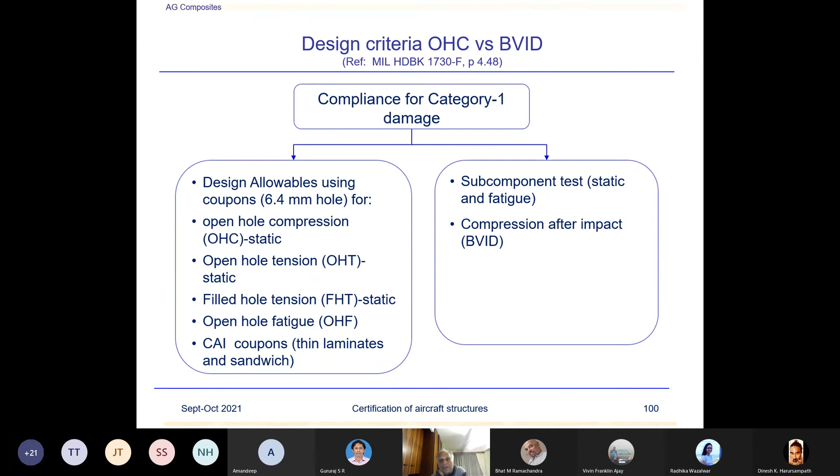And that is how we develop the compliance philosophy. Determine the allowables with these damage sizes and determine the residual strength we require at least, through subcomponent testing, coupon testing, and compression after impact testing.

For categories 2, 3, and 4, we design allowables using large damage coupons and panel test data, subcomponent and component test and analysis methods. Any questions so far on these damages?

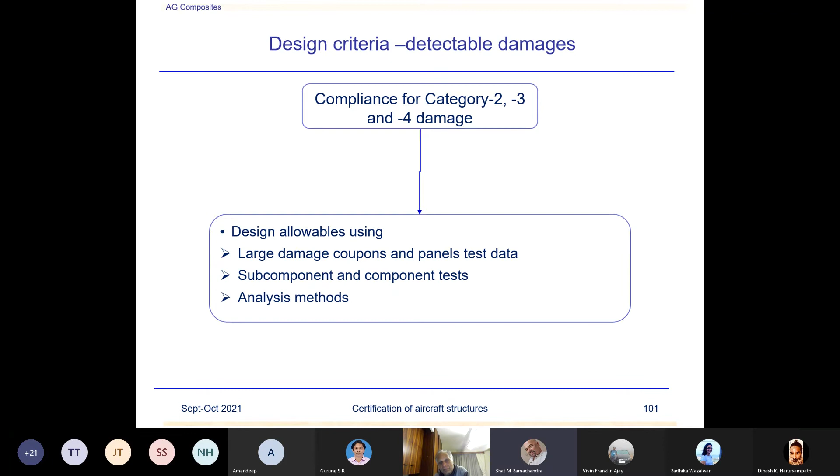Anyone? Yeah, Dr. Garg. When we say readily detectable damage, and if they are to be repaired before the next flight, we said after repair, it should be able to take the design limit load, ultimate load. Now, if this is a component of the aircraft itself, how is it tested to make sure that it meets that requirement?

Is the component tested to that particular ultimate load? No, it's theoretical. You know what happens - all these repairs, when we specify, we qualify the repairs by initial testing. Like suppose we are defining, you have a flap.

A flap with different thicknesses in different regions and different layups. And the damage could be anywhere, suppose. So we define, okay, in this damage zone, this is my damage limit - you can have a 2-inch hole or 3-inch hole. And airlines have to repair that 3-inch hole.

We provide the repair scenario - how they will repair, what kind of layup they would use, what kind of material they would use. And that repair, which we have designed, which airlines will carry out, will already meet the ultimate load requirement.

Oh, I see - the actual loading need not be done. No, the thing is, because we have given the airlines the repair manual. The purpose of the repair manual is to define for the airlines that if this damage occurs in this region, you use this repair philosophy.

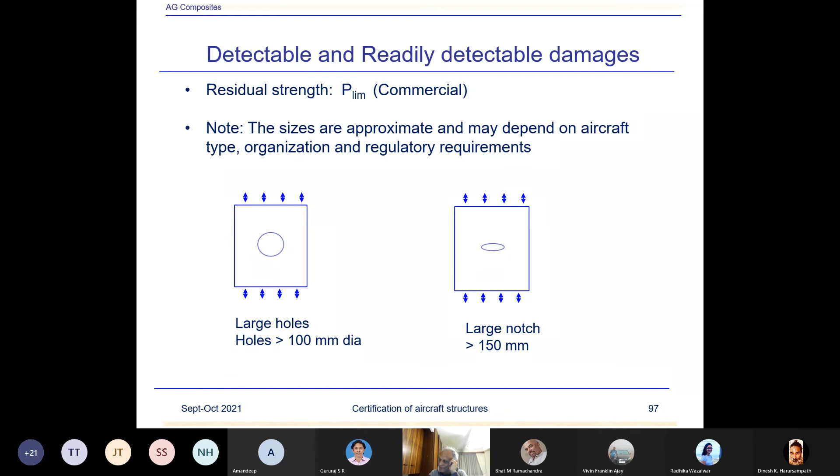Okay, so detectable, readily detectable damages - we've defined this. Any other question before I move on from here? No.

Okay, so I consider a few steps for the analysis of the structure. I won't go into the details of that, just schematically. So you have a product.

CAD - using CAD these days, everything is done by computers, computer-aided design. Those days are gone when a drafting engineer would draw a sketch and then we'd manually start analyzing the structure. Now nothing is done by hand, it's everything on the computer, CATIA.

Normally CATIA, computer-aided design, is used for all the structural analysis. The designers draw the scheme, and that can directly be converted to Nastran or Abaqus to analyze the structures.

Product CAD geometry, structures for analysis, all interfacing structures, then FEM modeling, mesh geometry, fastened connections, interfacing joints, materials and element properties, aerodynamic pressures, inertia forces, and any other external loads, boundary conditions.

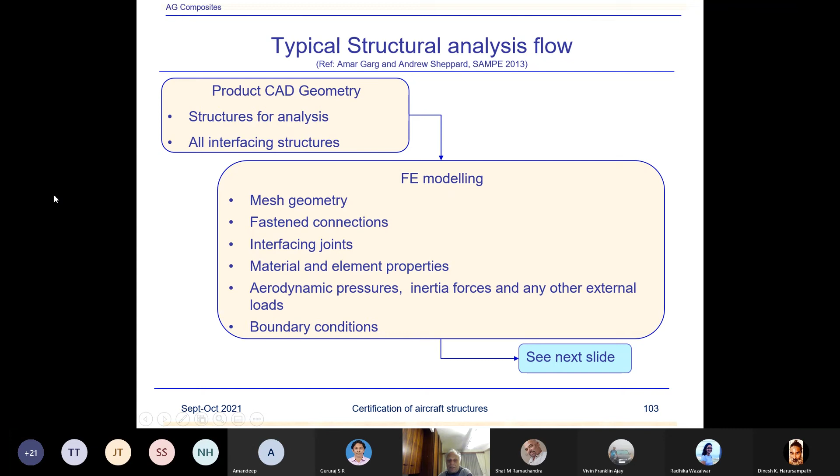Once you have made the FE model and incorporated all the interface loads, FEM.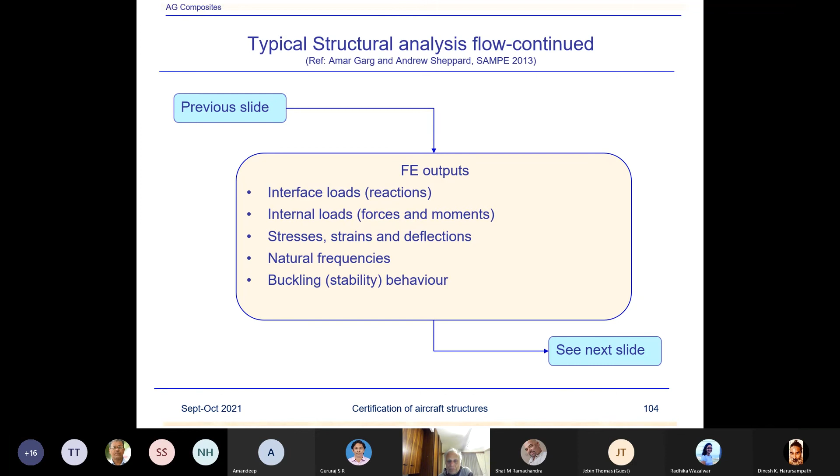Once you have got those internal loads and the interface reactions, the first thing you would do is draw a shear force, bending moment, and torque diagram. This is fundamental for any structural analysis - we must understand shear force bending moment diagrams. That's classical analysis, basically what we were taught in second year mechanics in IITs.

And that is always valid. The shear force bending moment diagrams are very important for structural analysis.

Once you have that, you want to analyze the fittings - fitting strength analysis. Let me tell you, fitting strength analysis is still usually done by hand. Of course, hand doesn't mean by pencil and paper - we use analysis tools.

Excel spreadsheets for analyzing, rather than generating the FEM analysis for the fittings. Usually, of course, it's doubled sometimes - the FEM is also done for the fitting models, and hand analysis usually.

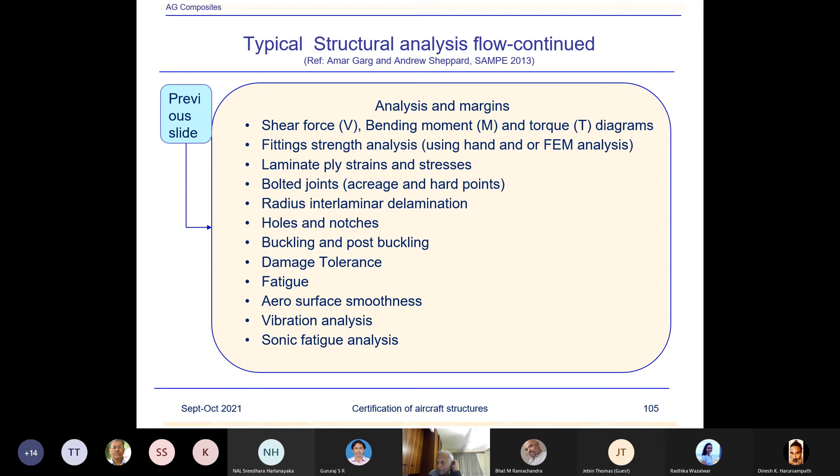Lots of methods have been developed within Boeing. They have spent millions of dollars developing methods for large notches. I could talk about it next time. If you go to the NASA website, you may find interesting papers for large damage analysis based on cohesive elements, which is now inbuilt in Abaqus. I could send you the list of papers if you're interested in reading them, but if you go to the NTRS, NASA Technical Reports Server, you'll find lots of papers on large notch damage methods. A lot of work has been done.